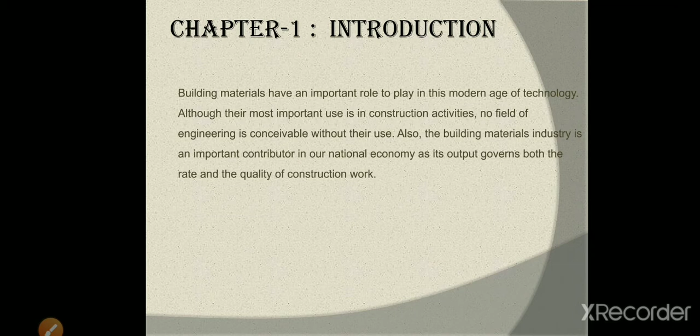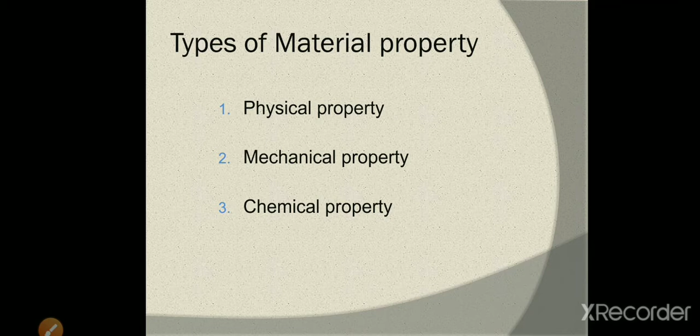Types of material property: physical property, mechanical property, and chemical property. Physical property: density, bulk density, porosity, void ratio, hygroscopicity, water absorption, water permeability, weathering resistance, thermal conductivity, thermal resistivity, durability, frost resistance, fire resistance.

Density: mass per unit volume of material is called density. Bulk density: mass per unit volume of material in its natural state with pores and voids is called bulk density. Porosity: the ratio of volume of voids to volume of specimen is called porosity.

Hygroscopicity: property of a material to absorb water vapor from air is known as hygroscopicity. Water absorption: the ability of the material to absorb and retain water is called water absorption. Permeability: the capacity of material to allow the water to penetrate under pressure is called permeability.

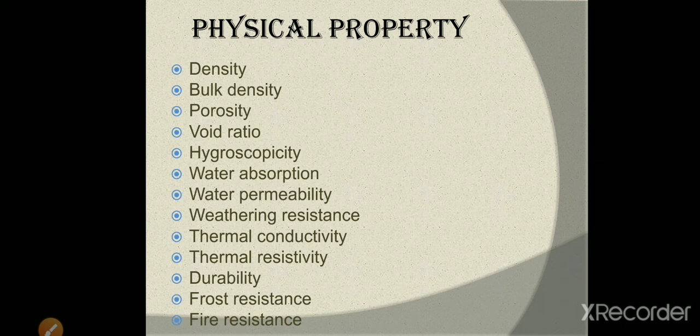Mechanical property: strength, elasticity, plasticity, brittleness, ductility, hardness, abrasion, creep, fatigue, toughness, soundness. Strength: the capacity of material to withstand load is called strength. Elasticity: when external load is applied on a material, it undergoes deformation, and on removal of the load, it returns to its original shape. This property of material is known as elasticity of material. Such a material is called elastic material.

Plasticity: a material that does not regain its original shape on the removal of the external load is called a plastic material. Ductility: if a material can undergo considerable deformation without rupture and can be drawn into wires, it is called a ductile material. Brittleness: if a material cannot undergo any deformation when some external forces act on it and it fails by rupture, it is called a brittle material.

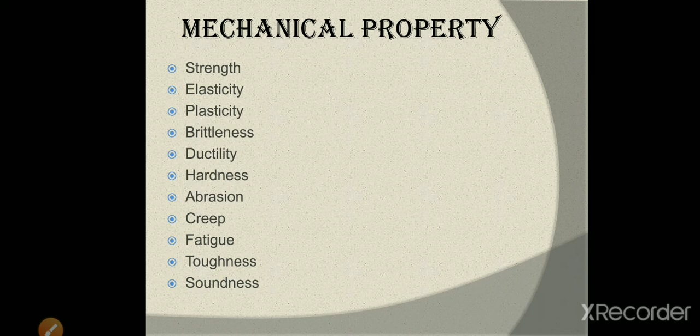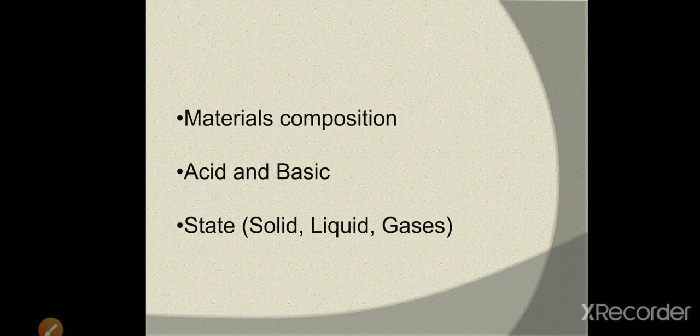Chemical properties: material composition, acid and basic, state: solid, liquid and gases. These three properties are chemical properties. Factors affecting selection of materials: quality, availability, durability, strength, workability, appearance, transportation, climate, modern technology, economy, speed of construction. These factors affect selection of material.

First, quality. Material should possess the required quality. Selection of the best material for an ordinary job may prove uneconomical. Hence, material of the required quality is the appropriate one. Second, availability. Material selected should always be available as and when required. Purchase of material is normally done stage-wise to avoid huge investment and the problems of safe storage of material. Third, durability. The life of material selected should never be less than the life of the component of the structure. Material should be sufficiently strong to resist the forces expected.

Fourth, strength, as stated earlier, the material need not be the strongest one, but of course it should be resistive to safely perform its functions. Fifth, workability. Material should be such that it can be brought to the required shape and size with minimum effort and less skill. Appearance. Material exposed to the vision should have good appearance and proper color. Transportation. Locally available material saves transportation, packing and handling charges. No breakage during transportation. Climate. Material should suit the climate conditions.

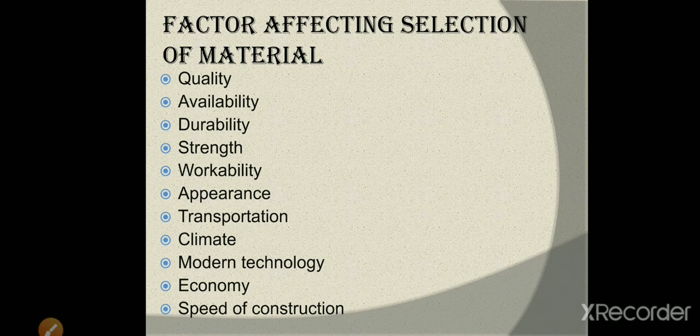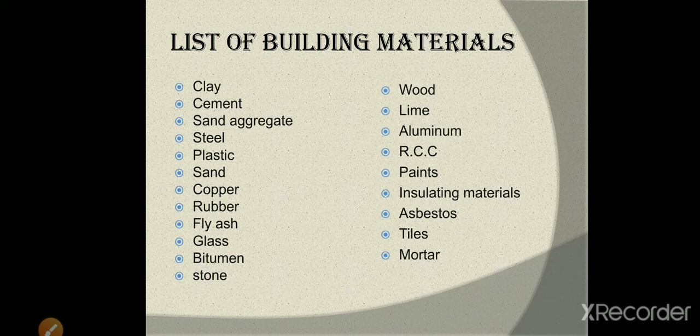List of building materials: clay, cement, sand, aggregate, steel, plastic, copper, rubber, fly ash, glass, bitumen, stone, wood, lime, aluminum, RCC, paints, insulating material, asbestos, tiles, mortar. These materials are used in construction. Now, tests. Material should be tested: bricks, stone, lime, cement, concrete. It should be tested in the field and laboratory also.

In bricks: general qualities, dimensions, efflorescence, water absorption, strength and warpage. In stone: acid, attrition, crushing, freezing and thawing, hardness, impact, water absorption. In lime: physical properties, acid, heat, ball test on limestone. In cement: fineness test, setting time test, compressive strength test, soundness test, heat of hydration test, tensile strength and consistency. In concrete: grading of aggregate, water cement ratio, workability, slump, etc.